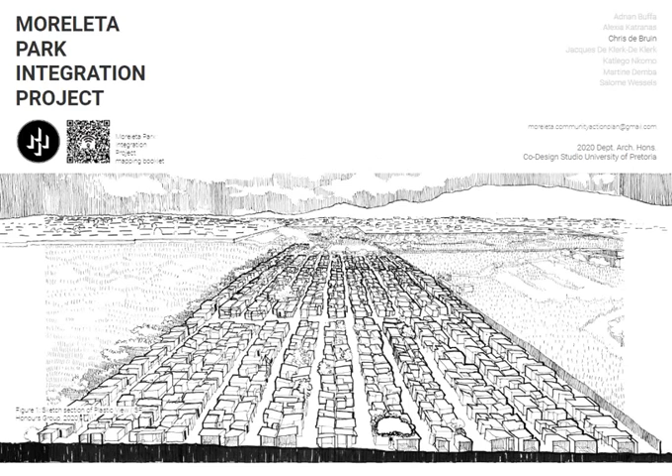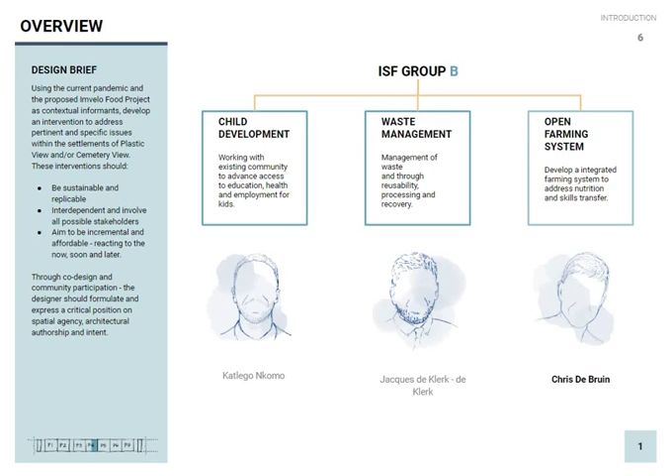From the group presentation, I'm continuing on to phase 4 and onwards, but first a brief overview of the project structure. As discussed, we developed a brief to address specific problems sustainably and interdependently within the communities, where Katlego, Jacques and myself aim to address childhood development, waste management and nutrition by involving as many stakeholders as possible.

We'll develop each project in 3 phases: the now, soon, and later, working at larger integrated scales to address important issues quickly while giving space to speculate on spatial agency.

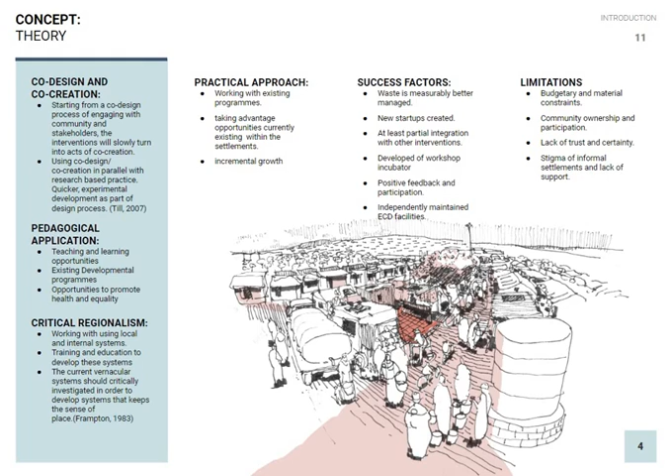We presented our initial ideas to key stakeholders with specific priorities for each intervention. We approached the interventions using co-creation to generate knowledge and exchange skills while responding critically to the surrounding context.

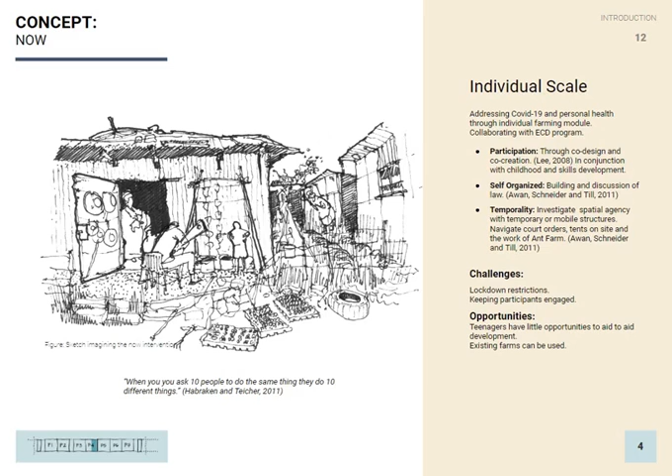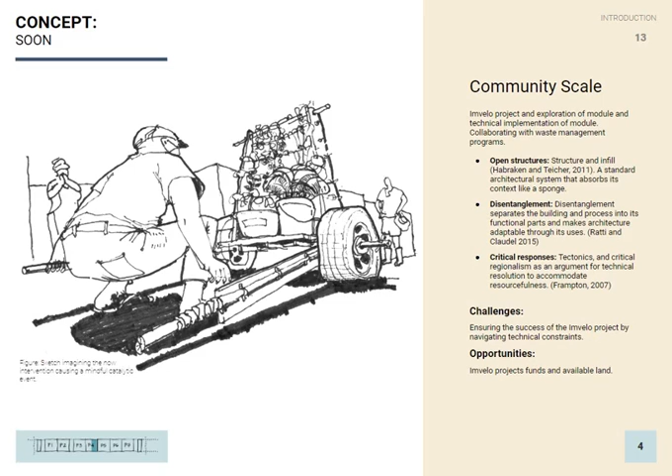Next, on a community scale, the IMVELO project is the main program to formalize knowledge obtained in the first phase through modular systems, service disentanglement, and critical responses, attempting to integrate the settlement into the larger community.

Finally, on an urban scale, the intention is to compile all the lessons learned and open source this to the public. This IMVELO farming system could then be used in other contexts and developed independently.

The challenge remains for the system to become so resilient that it can soak up its context like a sponge through its co-creation, and develop a framework for practice to interface with these open source designs effectively.

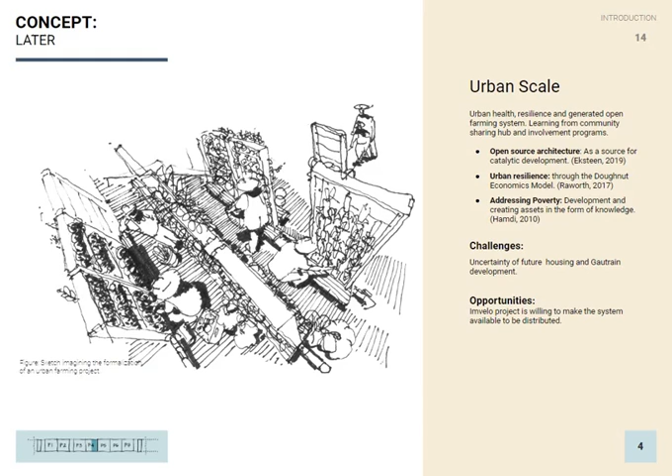Because after reflecting on the role of architects, the possibility exists to develop a new framework for implementing co-design sustainably within practice. With this in mind, we evaluated initial concepts through precedent studies.

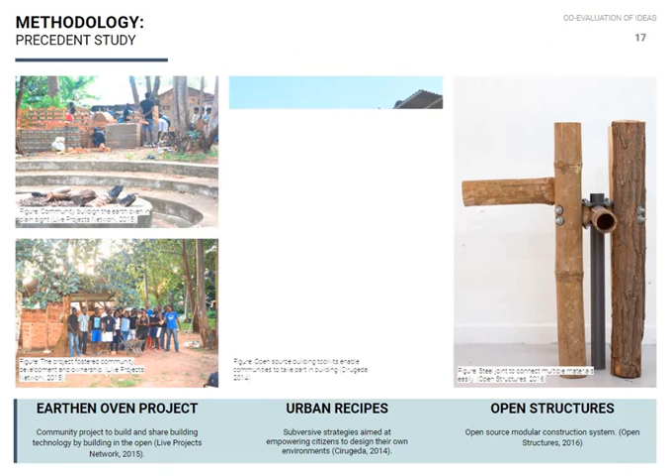This system, the open structure system, offered valuable insights as it is an open source shared grid, like a Meccano playset, but everyone has access to the system and everyone can contribute.

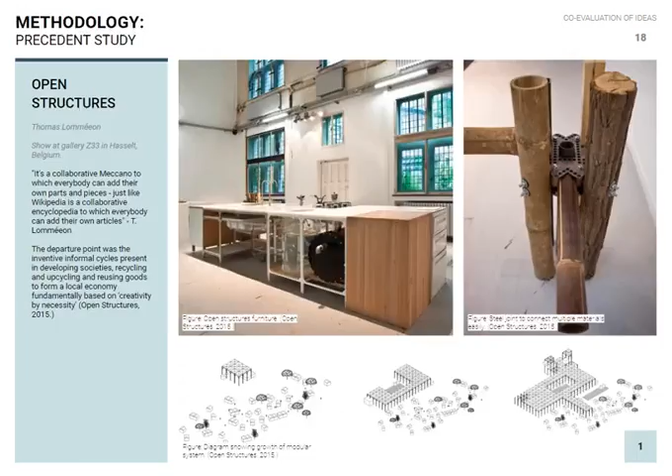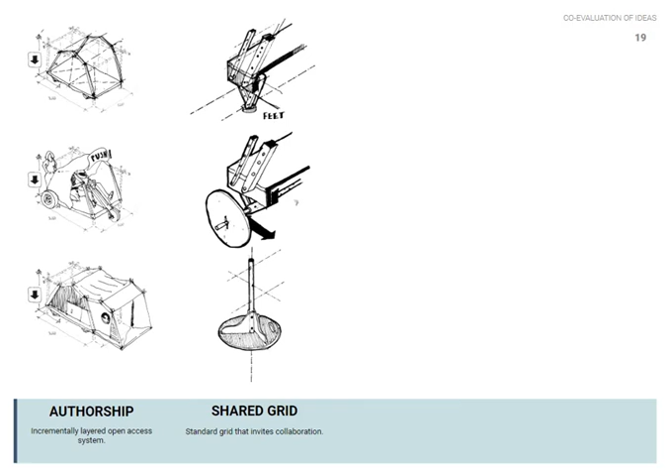This provides a platform for an incrementally layered authorship that could lead to surprising results. The shared grid invites collaboration and innovation. It presents a sustainable system for its flexible use and reuse of components.

We then used these principles to develop our concepts spatially for feedback. With stakeholder insights, especially regarding the lack of nutrition and adolescent social programs, we selected sites in both Plastic View and Cemetery View that are close to existing vegetable farms.

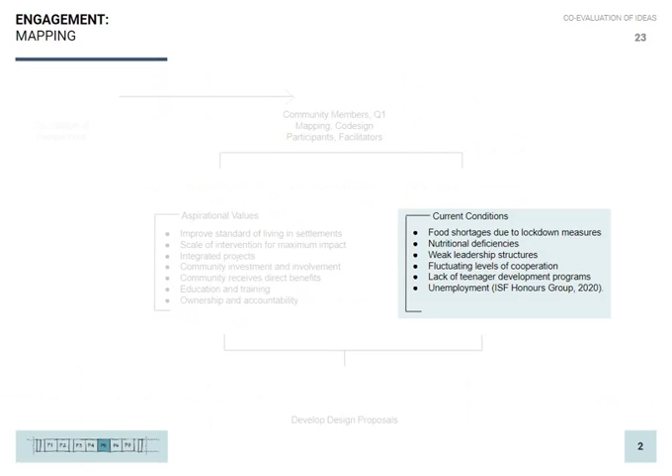As they will be the champions of these workshops and social gathering spaces, we developed a timeline to first spread information, execute a program in self-built temporary structures, and ensure that these resources act as catalysts for future development.

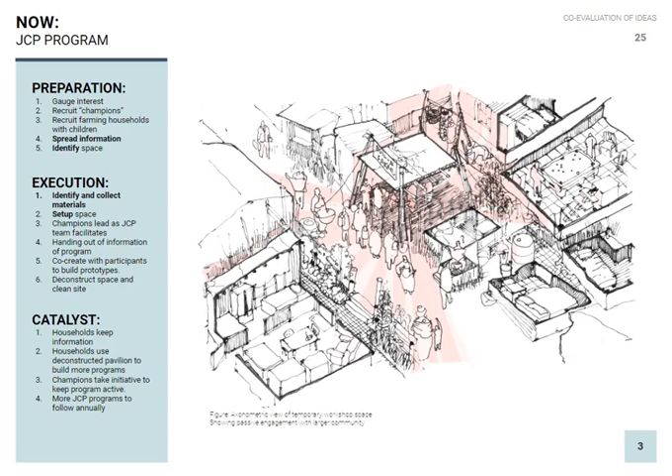For this to be effective, the temporary structures and farming modules have to be built within a specific shared grid system, i.e. being modular, built for disassembly and sourcing materials locally to establish a circular economy.

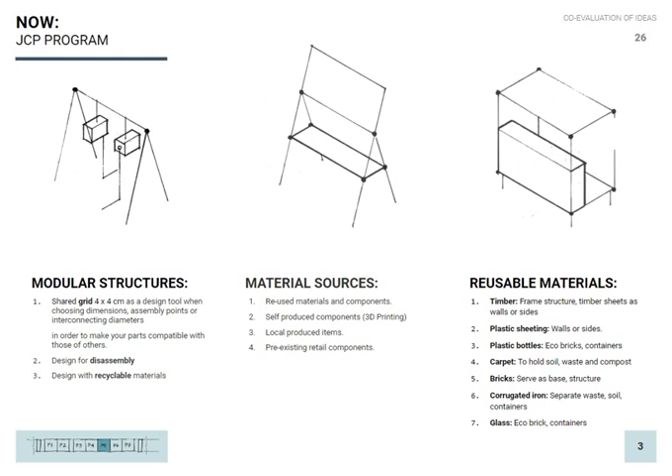This could allow for the development of a design system where functional requirements are specified, but the construction is left to the community to experimentally develop systems, and eventually even independently.

The process of co-design becomes co-creation, as research-supported experimentally developed spatial interventions. However, this is a formalized approach to the subversive nature of tectonics in these settlements.

At this point of design development, we split into individual projects, informed by local building technology and, albeit less, stakeholder feedback. Group members revealed valuable opportunities for social integration and addressing urban relationships.

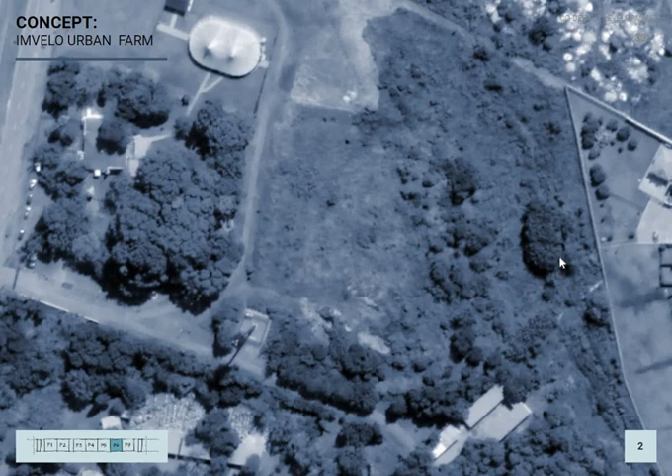IMVELO is to be developed on private land of a temporary church just south of Cemetery View. We received an initial functional layout, which I mostly agreed with.

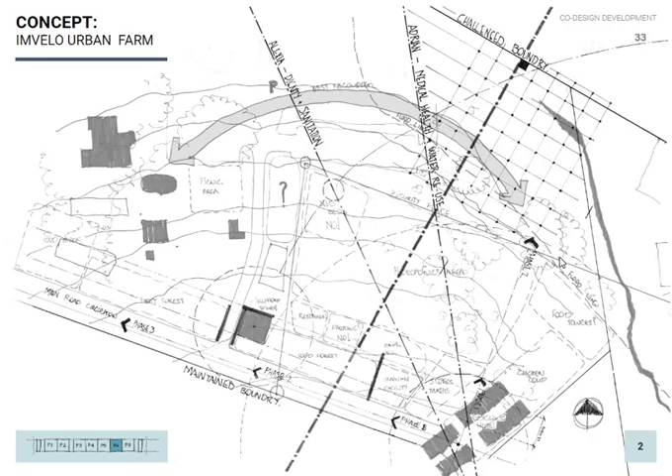However, overlaying Alexia and Adrian's spatial intentions revealed several spatial opportunities, leading to an initial idea of developing a building as such over 3 phases.

The establishment of a construction yard first allowed for the building to be built on site in a modular fashion. Development over time allows for experimentation and, in this sense, a building not planned per se, but anticipated. The growth, however, is constrained linearly for the easy expansion of services.

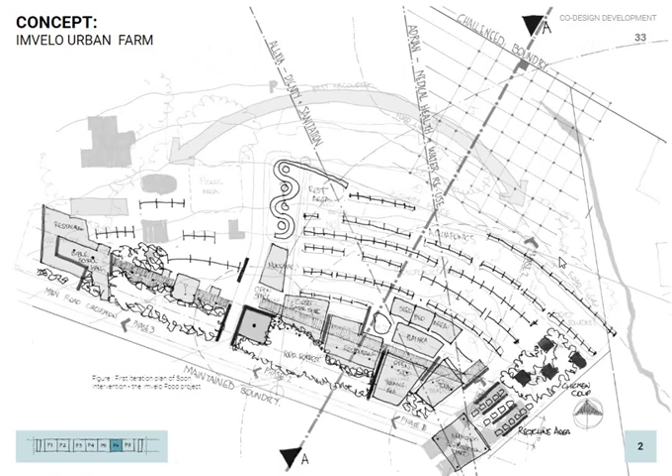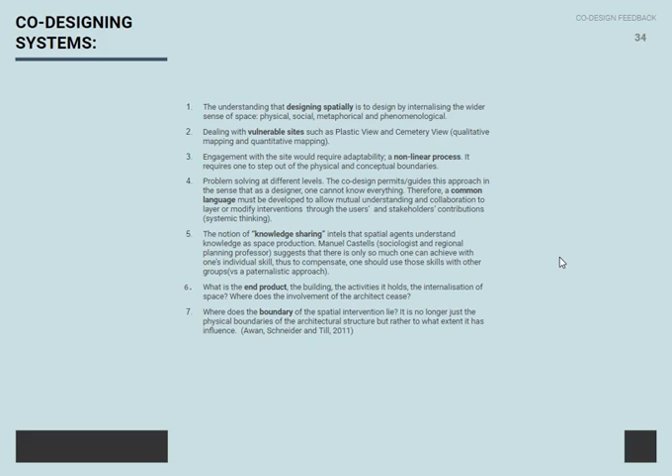Integrating these vulnerable communities is not possible with just a building, but more so with building systems—systems that create a common design language for collaboration and knowledge sharing towards a continuous renewal of space. Personally, I find this a challenging philosophy to design with, and it asks serious questions about the role of an architect. Upon reviewing the design, I challenged myself to remain a non-author, despite the resulting complexity.

I investigated the Table House by Jo Noero. This intervention is an attempt at creating local building culture and developing skills with small modular structures that give a sense of permanence in informal settlements.

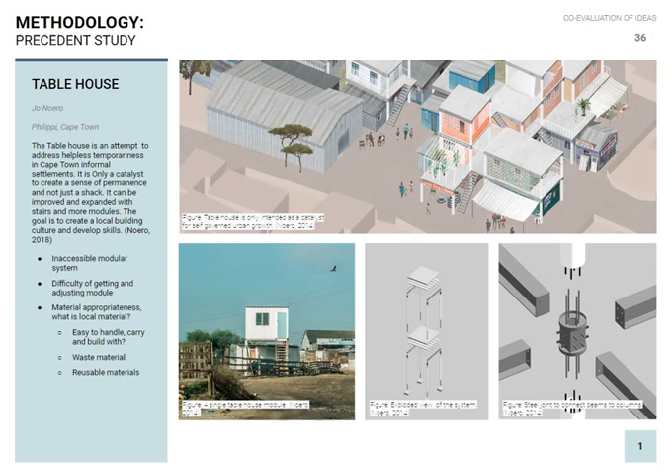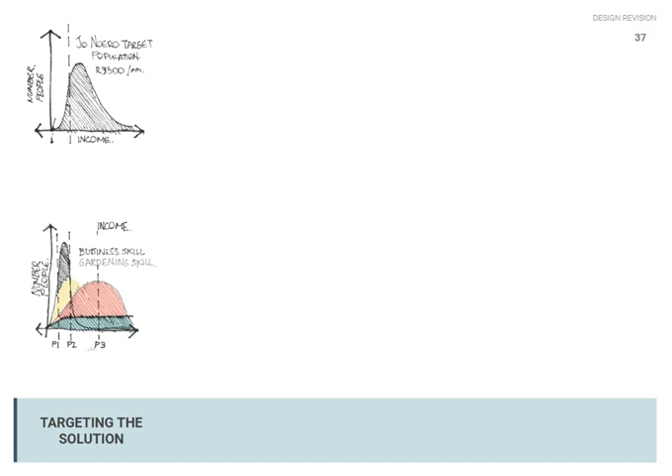However, regarding my own project, this presented a few problems. Thus I derived a few principles, such as not only targeting income groups to determine the cost of a project, but also counting other forms of social capital. Using this, one could develop a phased building model to utilize every available resource effectively, building on a human scale in terms of accuracy of construction and component sizes, and lastly, questioning what local materials really are.

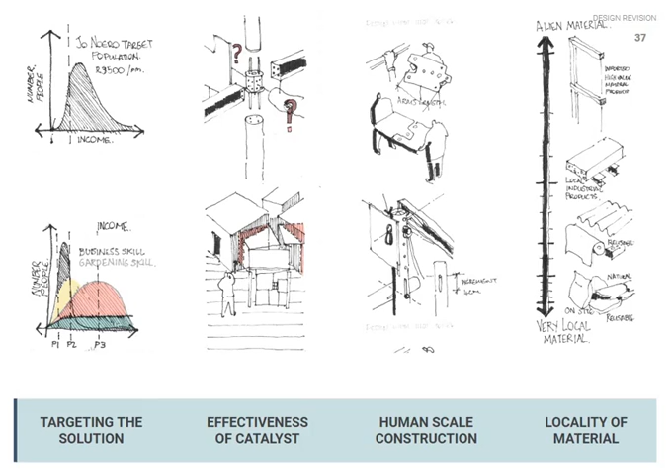In the last week, designs were refined based on feedback. A meeting with actual farmers revealed many technical considerations of the design.

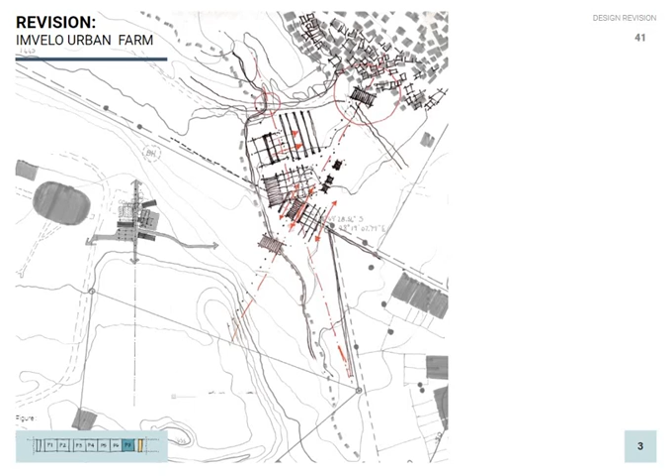The intervention was moved closer to other projects to utilize the bad quality of soil in this portion of the site. Phase 1 to develop basic systems. Phase 2 for commercial expansion. And Phase 3 for continual growth and expansion as needed.

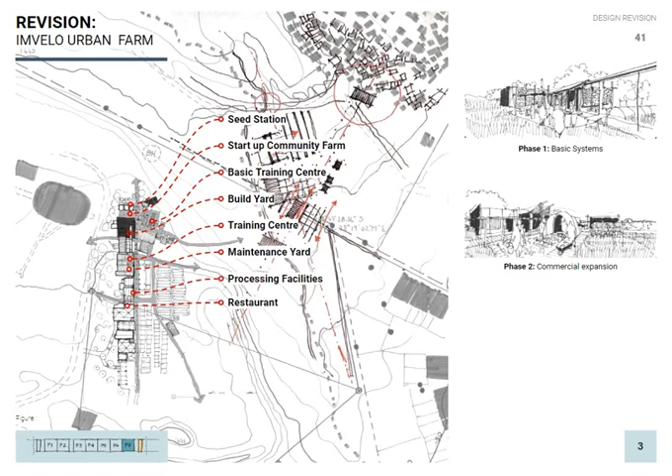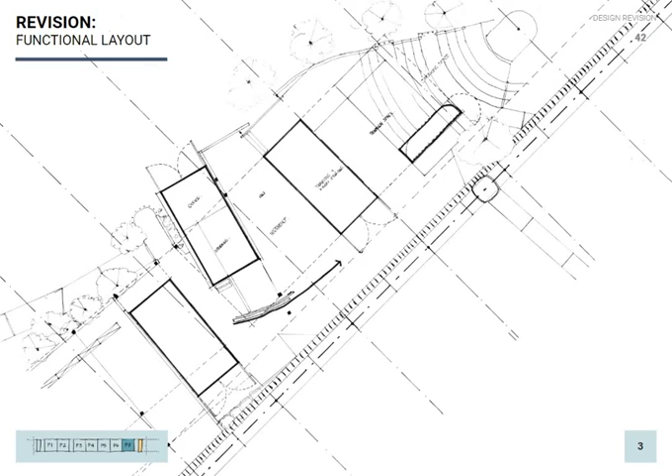I took cues from Cemetery View and how they responded to a boundary wall, to anticipate how the intervention could possibly grow along a linear service line, where each phase could introduce unexpected variations, additional programs, and functions—such as, in this case, three containers the IMVELO project recently received. Thus, the intervention remains in an undetermined state.

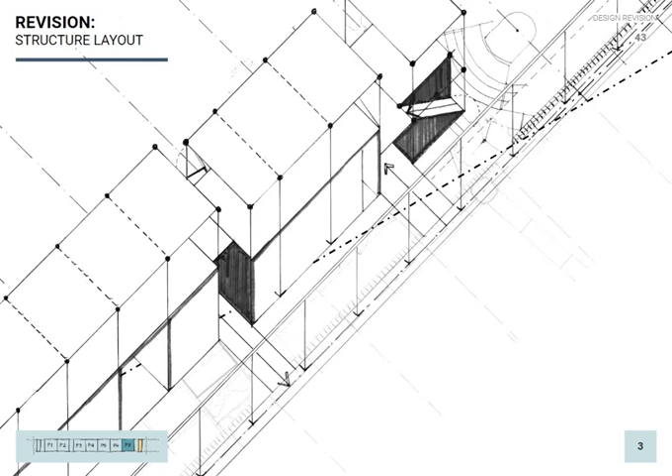Here I experimented with a graphic representation of building requirements such as stories, structural components, and a raised service line for flexible service arrangement. To accommodate a phased building approach, regular circulation routes absorb variances in construction.

Eventually, not as a final design but as a vision, co-design turns into co-creation. Here I try to anticipate local building technologies built with the surrounding skills available, the unexpected materials used, and community-led programs in conjunction with the functional requirements of IMVELO.

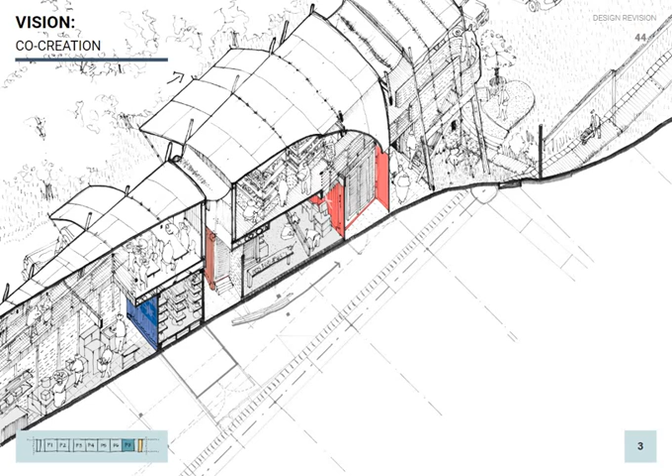I encourage the examiners to pause here and inspect a larger drawing uploaded in the addendum folder. The devil's in the detail. With local materials and building typologies, the intent was to develop a series of example joints and components to explore what a formalized open construction system could look like.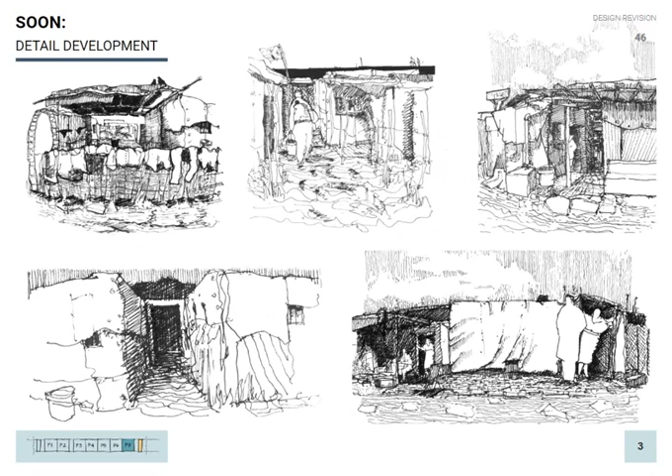This information, with additional site observations and sketches, informed an array of construction details that could accommodate the inconsistency, the inaccuracy, and availability of local recycled building materials.

But to conclude, the next stage of this intervention relies on compiling lessons learned to eventually derive an open source construction system—a system that would absorb and react to its context like a sponge upon its co-creation.

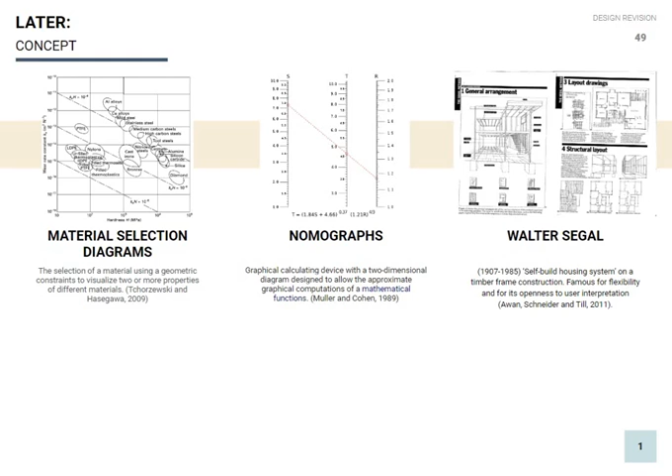I intend on using several tools for processing information, such as material selection diagrams and nomographs, to develop an integrated self-built construction typology, taking lessons especially from Walter Segal.

However, I intend to continue with this phase of the project in the fourth quarter of 2020, since for me, questions remain on the success of my intervention so far. I can only know how to continue after observing results and experimenting physically with JCP and Winter Studio interventions.

However, this is the nature of co-design. It's a continual process, not the means to a product. And despite the challenges, it's essential for spatial agency—especially in the Moraleta Park integration project—to acknowledge everyone's right to the city.